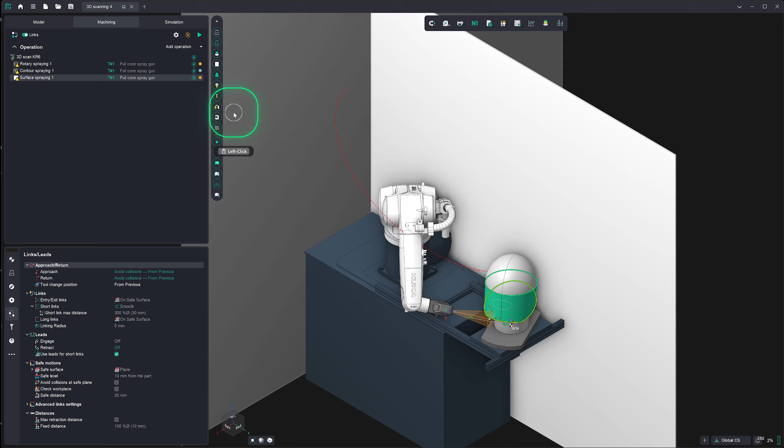So with that done, we're going to take a look at our final operation, which is the morph operation. Now I've left this to last because along with surface spraying, it's a little bit fussier to set up, but it's not the end of the world to do so.

So first thing that we're going to do is we're going to nominate the area that we wish to set up the operation for. So in the job assignments, we set our first curve here, and we set our second curve here, along with our machining surface. So now that we've got that, we're going to take a look at the strategy, and in this instance I'm going to go with along because why not?

Tool containment will stick with contact because otherwise we start getting it looping outside, and we want to try and minimize fuss to start with. We can always tweak and edit these things afterwards. I'm going to set the tool axis orientation to normal to surfaces. I'm not going to define a rotary axis for now, and we are going to take just a moment to check the links and leads setup as well, because by default it will always revert to a plane, which is of no use to us.

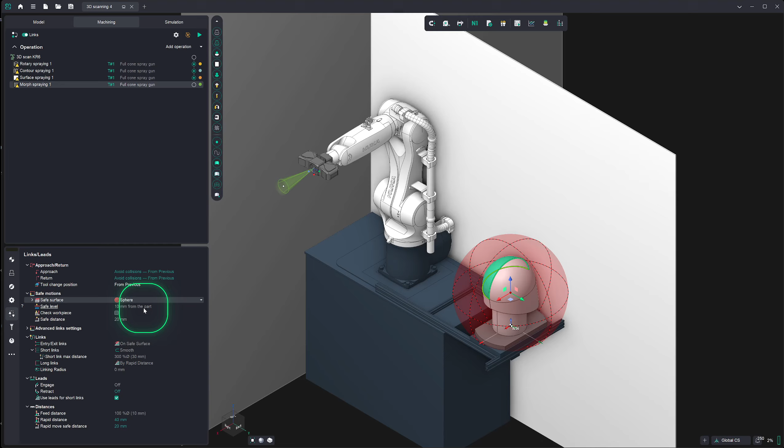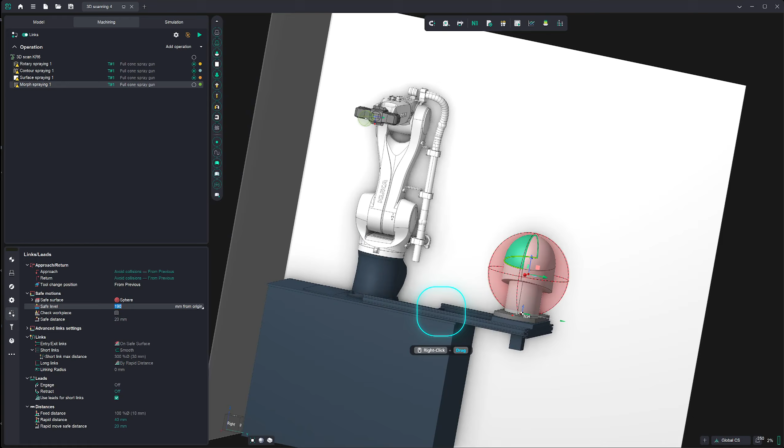So what we want in this instance is we want to use a sphere. Now, at the moment, 10 millimeters from the part means from the full extent of the part, and it understands this bit as being the 0 point. So what I'm going to do is I'm going to change this to from the origin, and holding down control and scrolling the mouse wheel, we are going to just bump that up to 190. It's a bit excessive for what we need, but it should get us most of the way there.

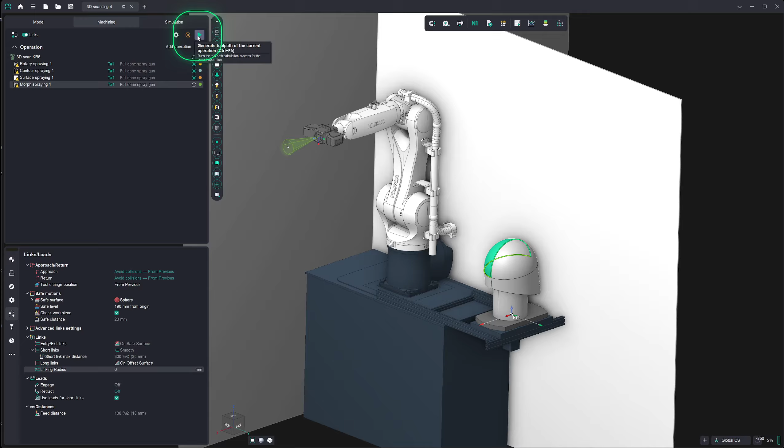After that, turn on check workpiece just to be safe, and entry and exit links on the safe surface. Long links, we might as well set that to an offset surface of, no, that's absolutely fine. And now we're going to generate a toolpath and see what it results in. So as we can see here, we've got a very, very tight step over along with a wildly over-torqued wrist. So let's take a look at the setup, and flip wrist has turned on and E1 has turned on.

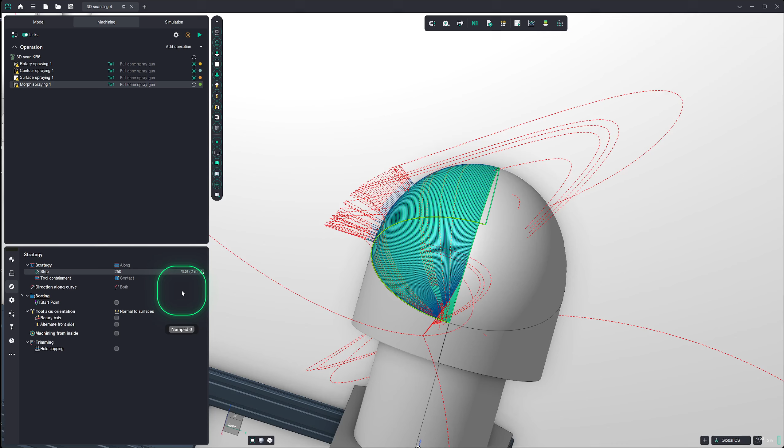So we'll go back into strategy as well, and we're going to set the step to 250% because 25 millimeters is perfectly fine for 3D scanning. And we'll regenerate the toolpath now. So we've got a rather wonky looking path there. It's not really ideal. So under setup, we're going to go to the axis map, and we are going to build our map.

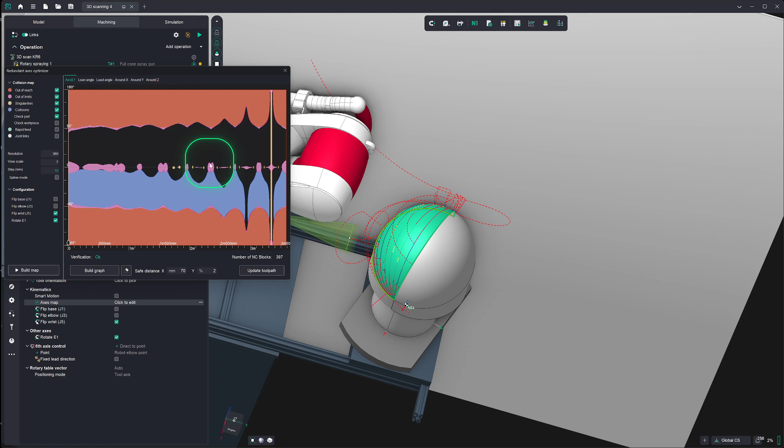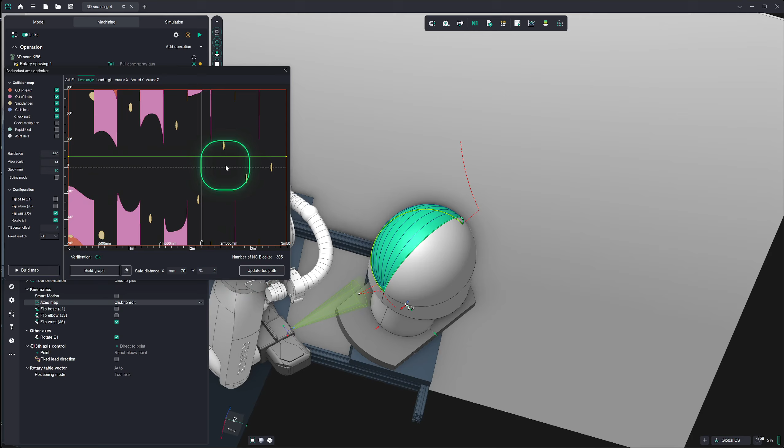Now, while this looks like we have got something to start with on either side of this, I am going to point out here, when we turn on collisions and check parts, one side gets blocked out completely. And this is a fairly common thing that will happen in this instance. So we're going to have to start from here and just ignore this singularity that's going on here for the moment. It's not the end of the world. As we cycle through the lean, lead and other angles, we will be able to get past it accordingly. As we can see, that singularity was being generated upon the 0 point here.

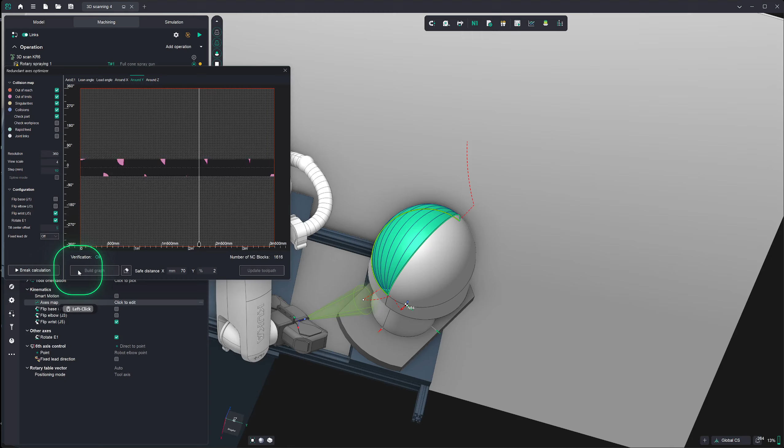So again, we're just going to quickly scrub through these, building graphs as we go. And we should find that because it's a fairly smooth path right now, we're not going to run into any major problems. And more to the point, we're not deflecting drastically off the 0 line, which means that we are going to get a fairly rational path from the start.

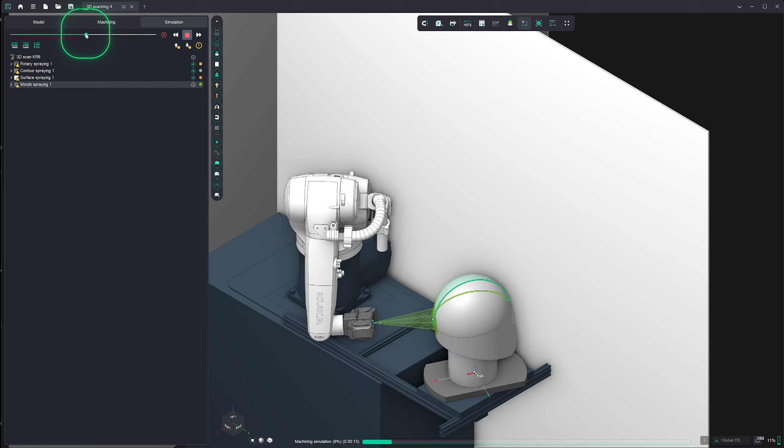So with that, I am going to suggest that we simulate this now. And we're just going to scroll the speed back. We are going to zoom out a little bit. And we're going to press run. And we can see that everything's pretty sane so far. We've got nice rotation around E1. We've also got nice angular deflection over the curve of the sphere as well, with nothing particularly wild going on between any of the axes.

Yeah, as I say, there's a little bit of a speedy rotation there on the last ones, but nothing to worry about certainly. But that should give us a really, really nice set of passes over the top surface of the helmet, which should capture all the possible details.